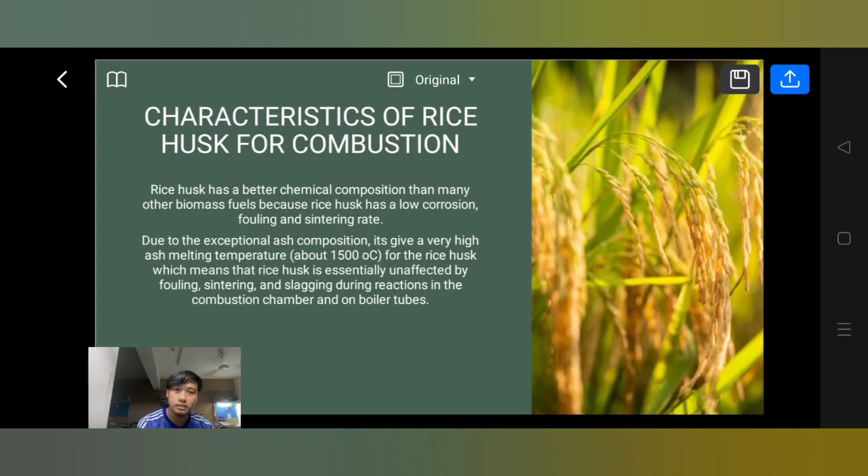Okay, next, I will talk about characteristics of rice husk for combustion. Rice husk has a better chemical composition than many other biomass fuels because rice husk has a low corrosion, fouling, and sintering rate. Due to the exceptional ash composition, it gives a very high ash melting temperature, about 1500 degrees Celsius, which means that rice husk is essentially unaffected by fouling, sintering, and slagging during reactions in the combustion chamber and on boiler tubes.

Next is the working concept for rice husk. From the rice husk, we will do a pre-treatment to reduce size, densification, and torrefaction. Then we will process it through combustion, gasification, and pyrolysis to make products of heat, gas, and liquid fuel. Then it will transform to heat energy, electricity power, syngas, and biofuel.

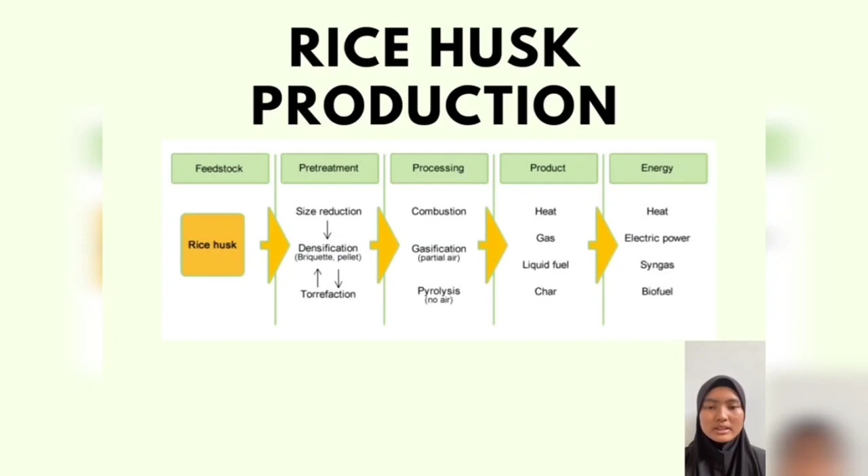Then I will explain about rice husk to form a fuel. The following is a summary of the characteristics of rice husk compared with other solid fuels in terms of energy uses. Its high silica content causes wearing of components in process machines such as a chopper and grinder. Content of volatile matter in rice husk is higher than in wood and much higher than in coal, whereas fixed carbon is much lower than in coal, and ash content in rice husk is much higher than in wood and coal, which causes barriers to energy conversion.

Its high content of ash, alkali, and potassium causes agglomeration, fouling, and melting in components of combustors of boilers. An available solution to resolve barriers in energy conversion from rice husk is pre-treatment. Rice husk could be prepared through mechanical, physical, and chemical means, or through bioprocess, or a combination of these processes to increase efficiency.

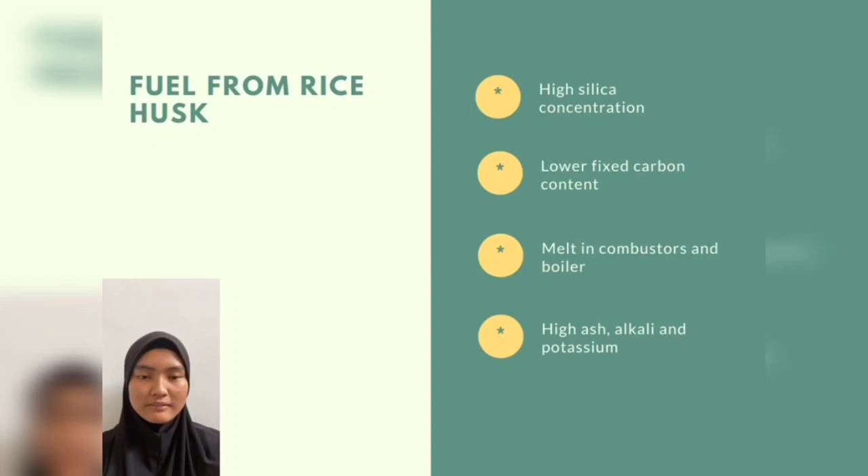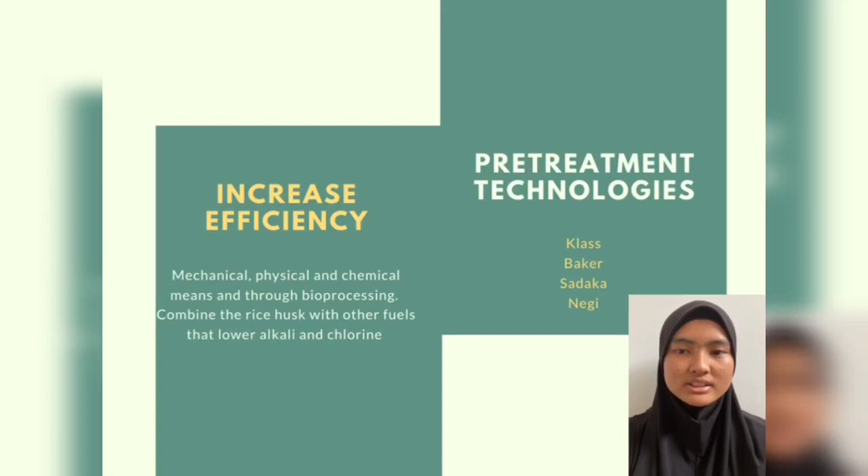For further energy conversion, these pre-treatment technologies can be referred to in Baker and Sadaka and Negi. Other solutions for ash-related problems in rice husk are to combine it with other fuels that are lower in alkali and chlorine, to reduce the temperature in the combustion system, and to use other types of conversion systems such as the organic Rankine cycle and two-stage combustion.

I will continue the presentation about rice husk to form electricity energy. Procedure of electricity generation from rice husk. There are several methods of generating electricity from rice husk. Among some effective ways, power generation by rice husk gasification is adapted here, and the system is designed in such a greener way that it involves absolutely zero emission.

Here biomass fuel is fed at the top of the reactor or gasifier. Then, as the fuel moves downward, it reacts with air. The suction of a blower or an engine supplies the air needed for the reaction, and then the air is converted into a combustion, producing a gas through a complex series of reactions. A downdraft gasifier is a chamber in which both the gas and the solids flow in the same downward direction.

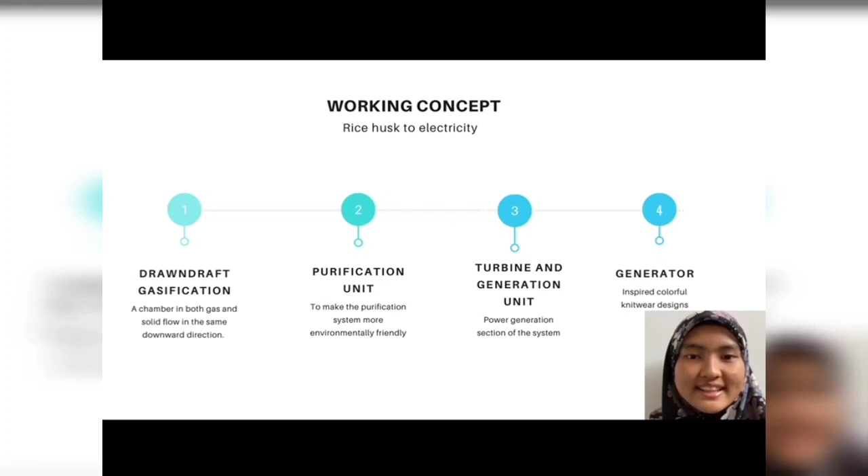This is the power generation section of the system. Here, the syngas collected from the purification system is used to generate electricity. Two types of turbine can be used, gas turbine or steam turbine. The turbine shaft is connected with a generator which generates electricity while the turbine rotates.

Okay, next. Today, technology progress has successfully built several rice husk power plants in several developing countries. This step taken by these countries is wise and beneficial to the world, people, the economy, and the environment especially. Among the power plants that already exist in the world and are close to us are: first, a power plant in the province of Isabela in Luzon, Philippines; second, a power plant in the province of Pichit in Thailand; and a power plant in the province of Srisangdaw at Roi Et, Thailand.

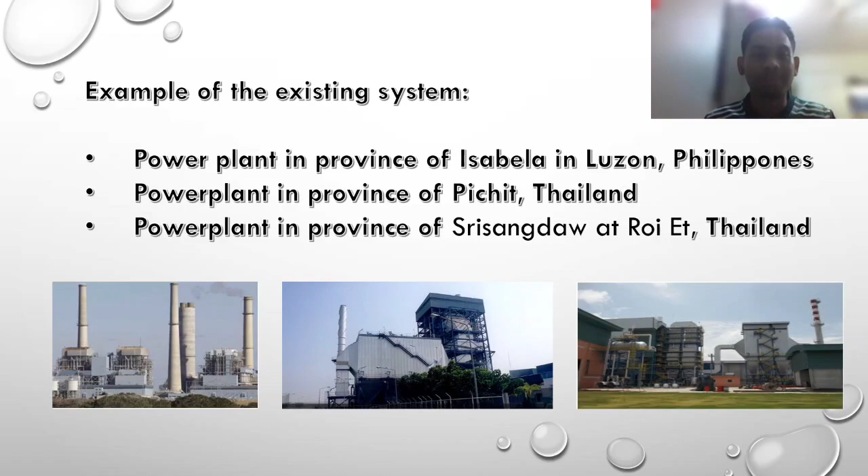Today I want to present a typical power plant functioning in a village, a 5 million watt rice husk power plant design. So the rice husk comes from the field and then goes to the husk power plant. It can generate electricity, and the electricity is then supplied to small enterprises for rural electrification in the small village.

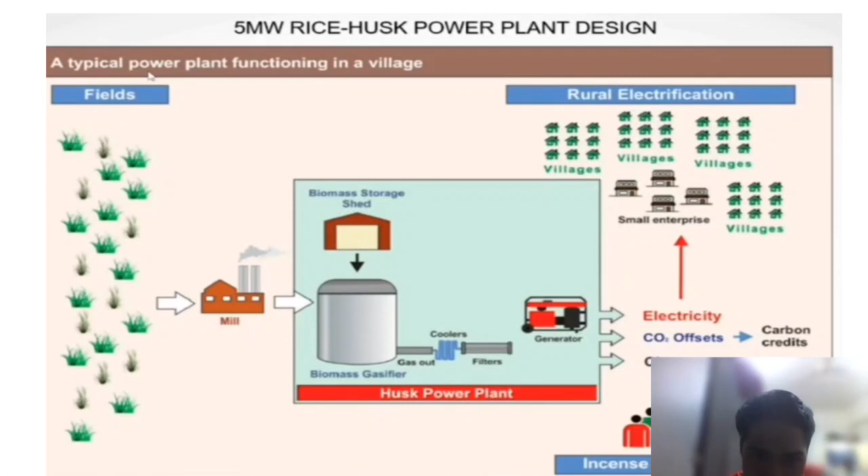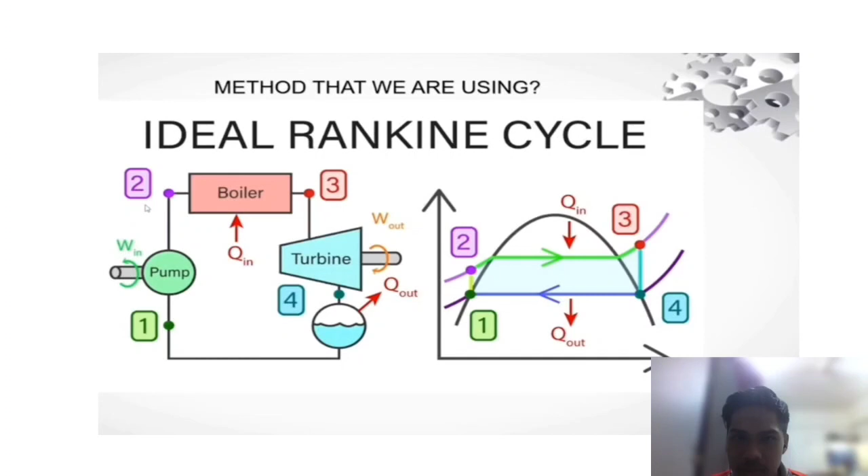Next, this is how the process in the Rankine cycle works. First, the pump supplies water into the boiler with high pressure, then water is heated inside the boiler. Then rice husks act as a fuel to heat the water, which becomes superheated steam and is sent into the turbine. Then the cycle starts again to drop and go into the condenser, from steam to turn into water, and into the pump.

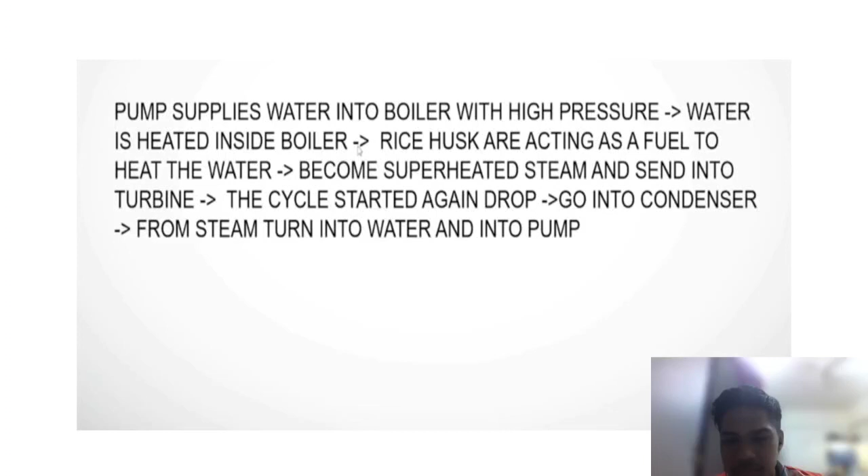Next, we go to the example of calculation. There are 4 states in the Rankine cycle: state 1, state 2, state 3, and 4. First, we have to assume for the calculation that there is no kinetic and potential energy transfer. The steam is superheated and high temperature, and the boiler and condenser are in adiabatic condition. In the calculation, P1 equals P4, P2 equals P3, and 5 megawatt output. This is the example of calculation.

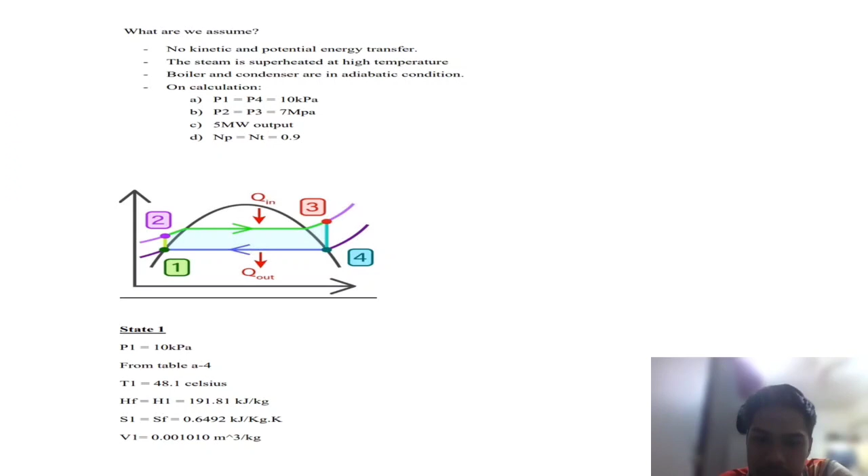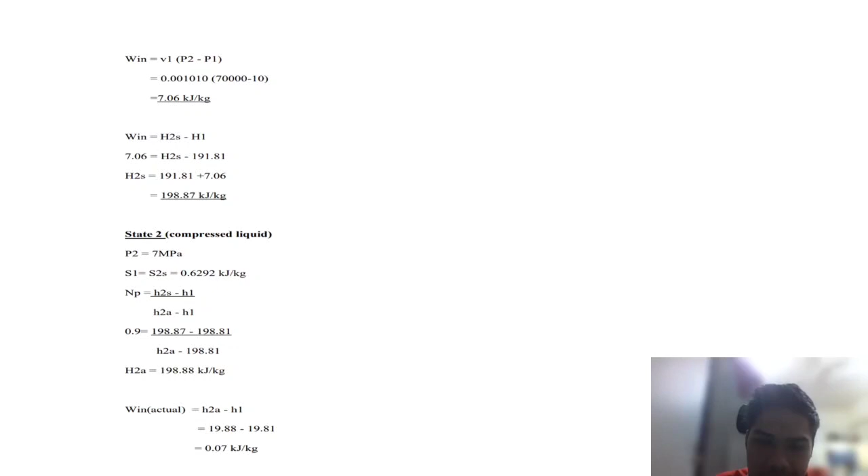So state 1, P1 equals 10 kilopascal. From the 10 kilopascal, we can refer to the table and get T1, H1, S1, and V1. Next, from the data that we get, we can calculate Win, which is V1 times P2 minus P1. So we get 7.06 kilojoule per kilogram. And from Win, we can calculate H2S, which is 198.87 kilojoule per kilogram.

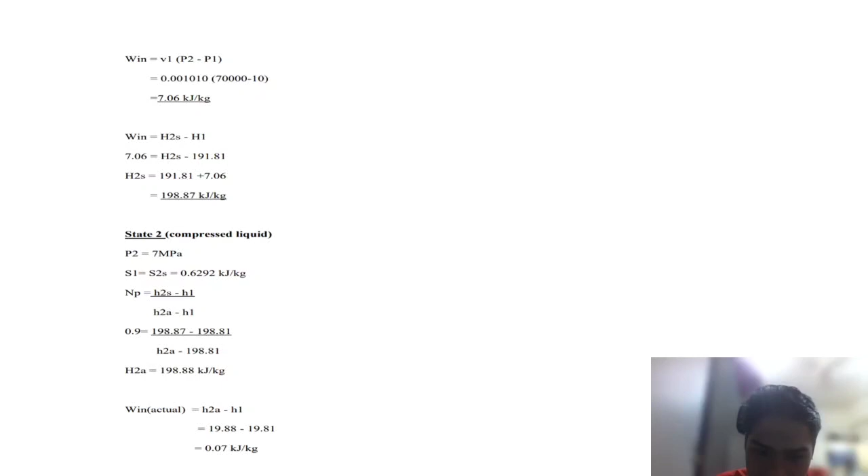So next we go to state 2, which is compressed liquid. From P2, which is 7 megapascal, we can get H2A, and we can calculate the Win, which is 0.07 kilojoule per kilogram.

Okay, next is state 3, which is superheated. For superheated, we can refer to the table, and P3 is the data given, which is 7 megapascal. Then we get T3 of 500 Celsius, H3 and S3.

Next we go to state 4, where P4 equals 10 kilopascal and S3 equals S4S. So X we need to find. From S4 equals SF plus X SFG, we get the X value, which is 0.8202, and then we can calculate the next step, which is H4S, which is 2153.81 kJ per kilogram.

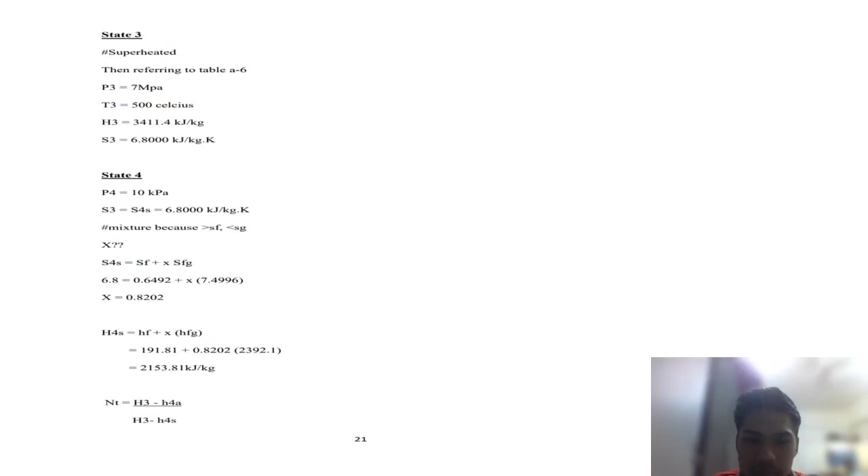So next, when we get the data for each state, we can find the W out, W actual, Q in, Q out, and thermal efficiency, which is 0.3523, and we get W out, which is 1131.83 kilojoule per kilogram. W actual we get 1131.76 kilojoule per kilogram, and Q in we get 3212.52 kilojoule per kilogram.

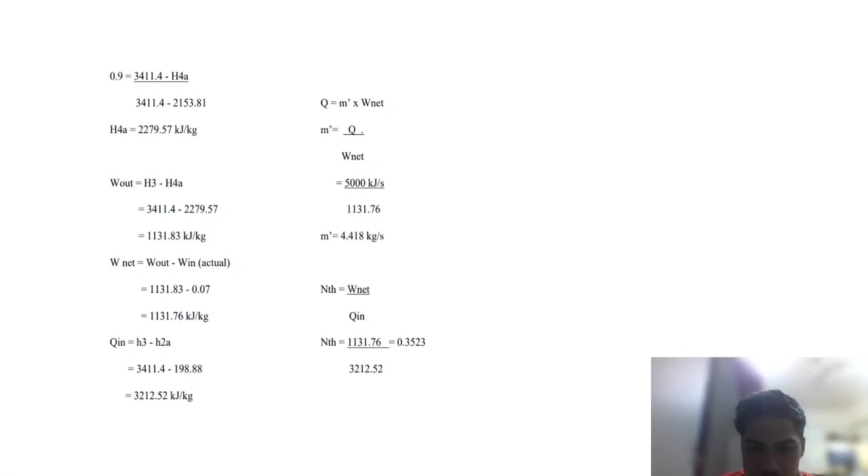Okay, so now we go to the conclusion for our project, investigation of rice husk. First, the development of technology today has greatly helped human beings in meeting their needs, especially in generating alternative energy. Technological advances have resulted in various thermal energy generation processes based on renewables such as solar power, biomass, biofuel, wave energy, wind energy, and many more. The project will be focused on biomass, which is rice husk.

For the investigation and study, the rice husk gives two products of energy, which are electricity and fuel for engines, commonly used in combustion boiler and steam turbine systems. The electricity is gained from the combustion of the rice husk to heat the water and produce water vapor to rotate the turbine and give electric power, while the fuel product is obtained through a fuel process from the rice husk biomass gasifier power system.

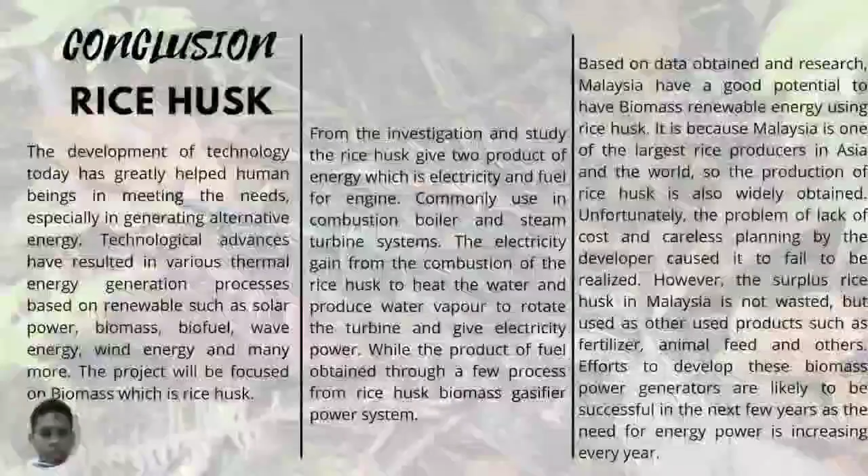Based on data obtained and research, Malaysia has good potential to have biomass renewable energy using rice husk, because Malaysia is one of the largest rice producers in Asia and the world. So rice husk is also widely obtained. Unfortunately, the problem of lack of cost and careless planning by the developer caused it to fail to be realized.

However, the surplus rice husk in Malaysia is not wasted, but used for other products such as fertilizer, animal feed, and others. Efforts to develop this biomass power generator are likely to be successful in the next few years as the need for energy power is increasing every year. That's all from us.